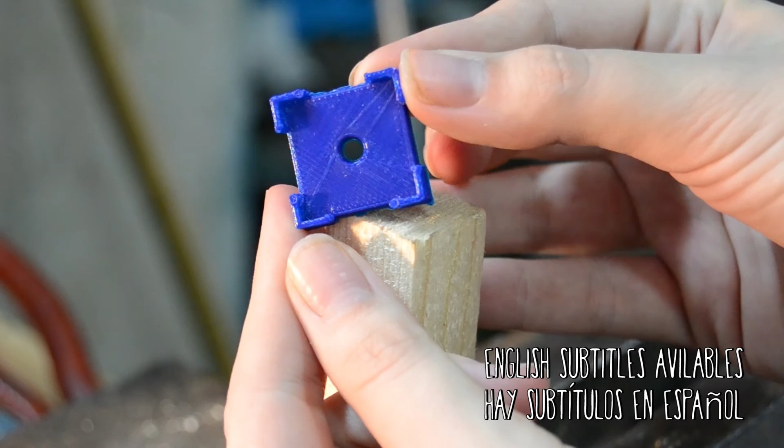I thought I could share the design process from my center finder or dowel placer from my last video, as you only saw the very watered down version in a sped up clip. Since then, I redesigned it to make it fully parametric for use in every slab type you have.

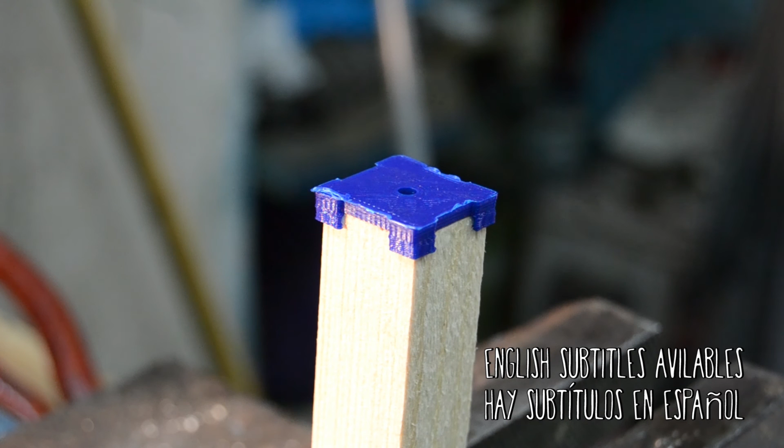First, I want to briefly mention my design approach to this geometric problem, since I based my design in one center hole.

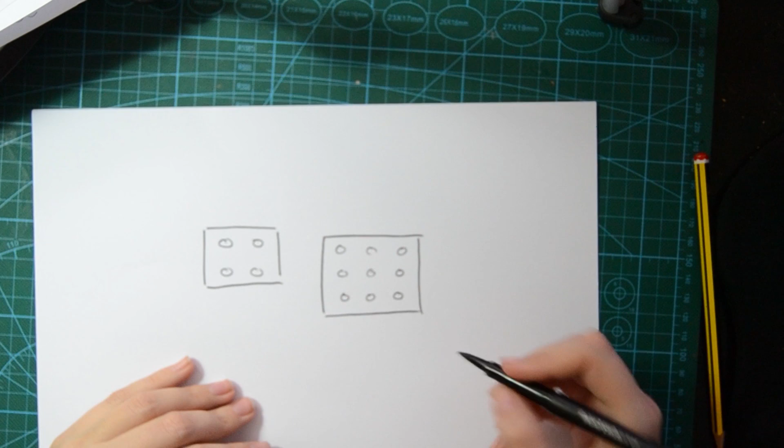The number of holes will be determined by two variables: the number of holes along the x-axis and the number of holes in the y-axis. And if in any of these axes the number of holes is odd, there will be a row or a column of holes, or a single one, centered in that axis. If not, there will be no center row or column of holes, so I had to find a way to express this in Fusion 360.

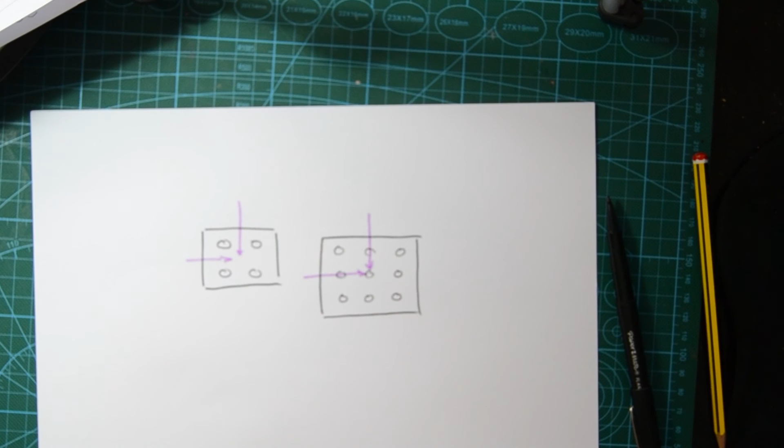Now we begin to design the piece. And since we'll be making it fully parametric, meaning that every measure will be able to be modified, we need to start defining parameters. Hole will be the diameter of every hole made.

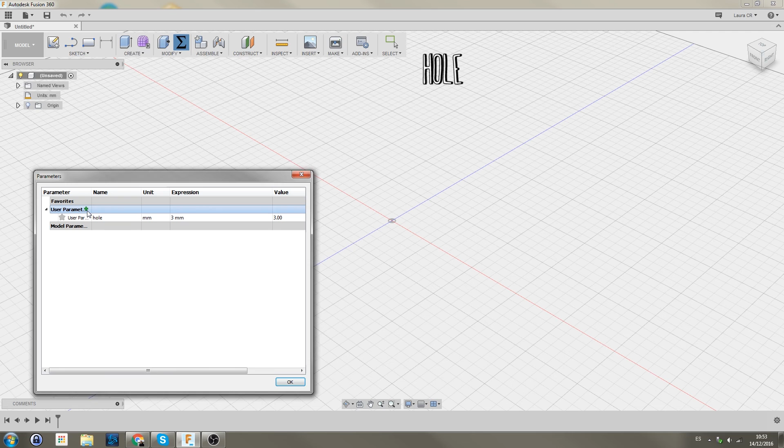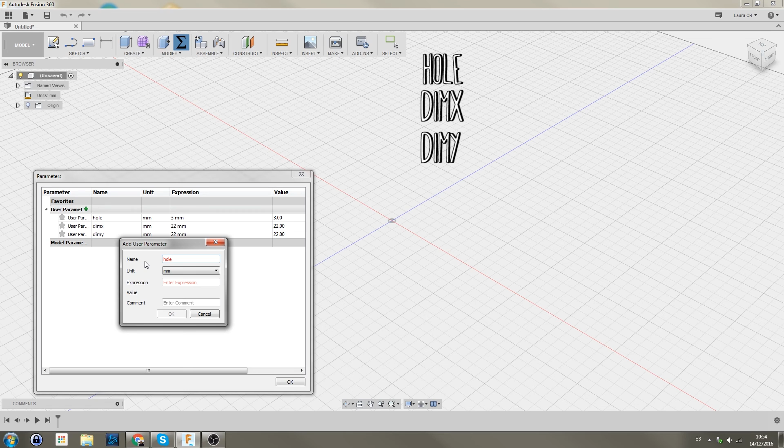Dim X will be one of the widths of the piece of wood we'll be using, and dim Y will be the other. Hole X will be the number of columns of holes, and hole Y will be the rows of holes. And both need to be a no-unit expression, or the formula will output an error.

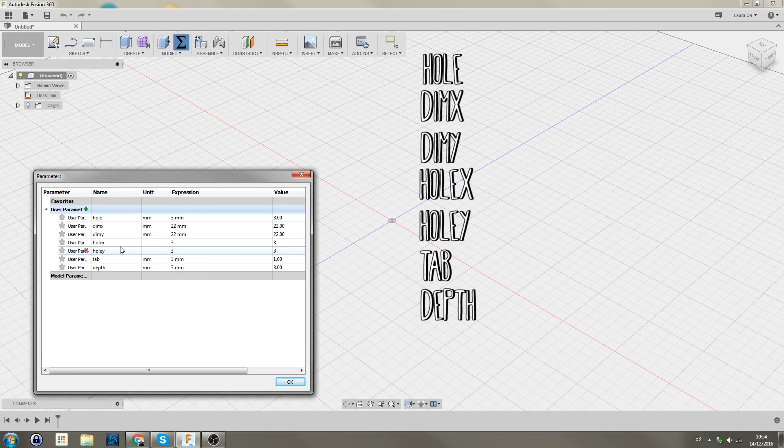Tab will be the thickness of the little tabs that will hold the printed piece to the wood, and depth will be the main thickness of the piece. AX will be the equivalent to a Boolean operator in the next formula, so it needs to be no unit in the unit dropdown, and the same for the y-axis in AY.

Odd X and odd Y will be the expressions that will help center the base hole, whether it's an even or an odd number.

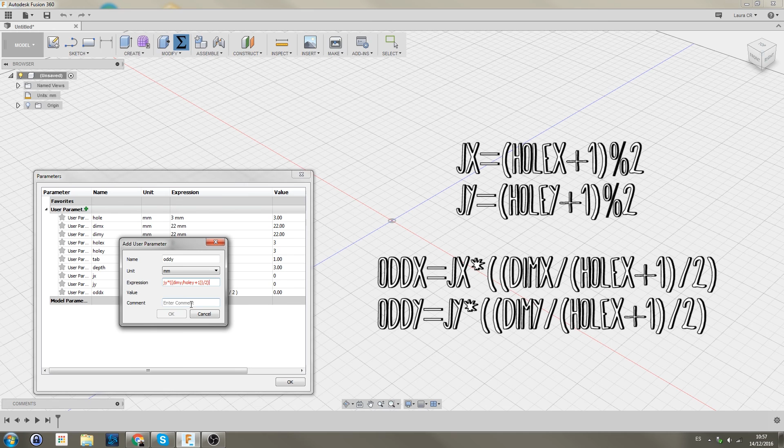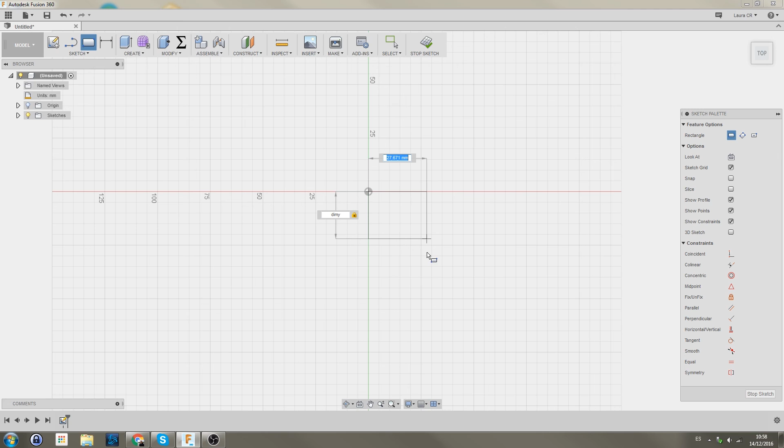We'll start to lay in geometry first by placing a sketch rectangle in the base plane and assigning it the dimensions dim X and dim Y in the X and Y axis. Then we will extrude it by an amount depth as defined.

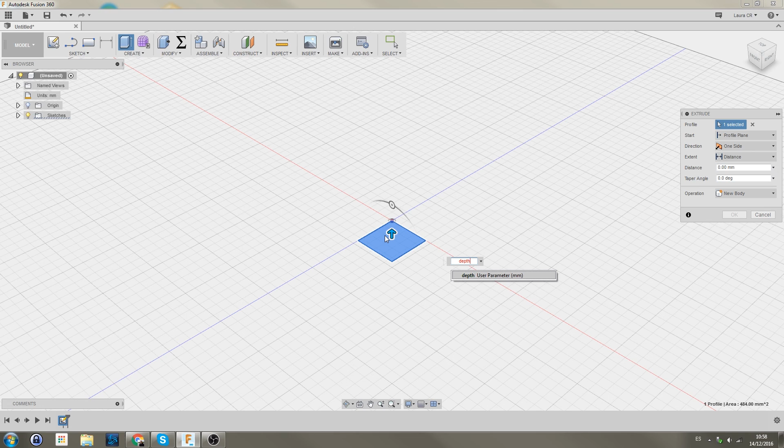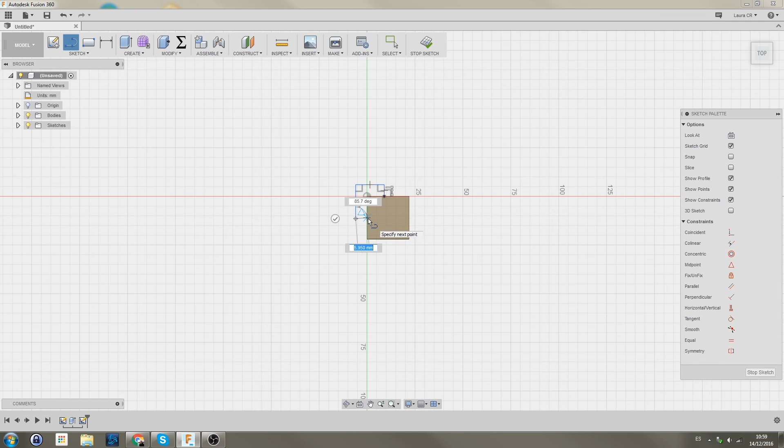Next, we will draw in the top left corner the first step, choosing the line tool and the upper face of the rectangle. We will assign dimensions starting with the thickness of the tab, which we define with the parameter tab, and the inner dimensions as 1/4 of the length in that axis.

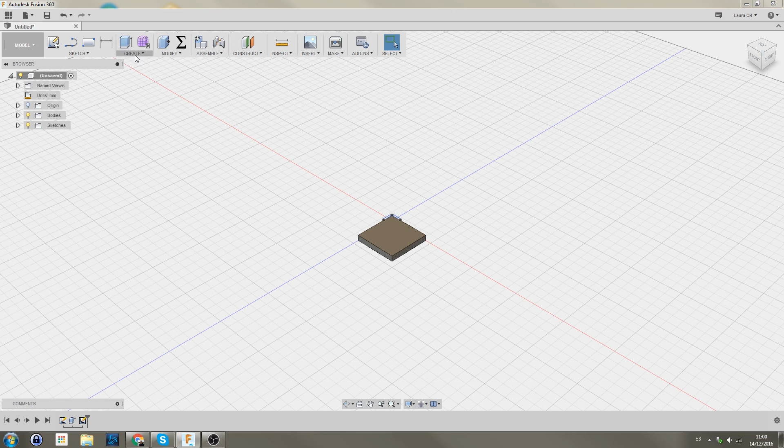This geometry will be extruded in both directions, the amount depth, and needs to be created as a new body in operation type.

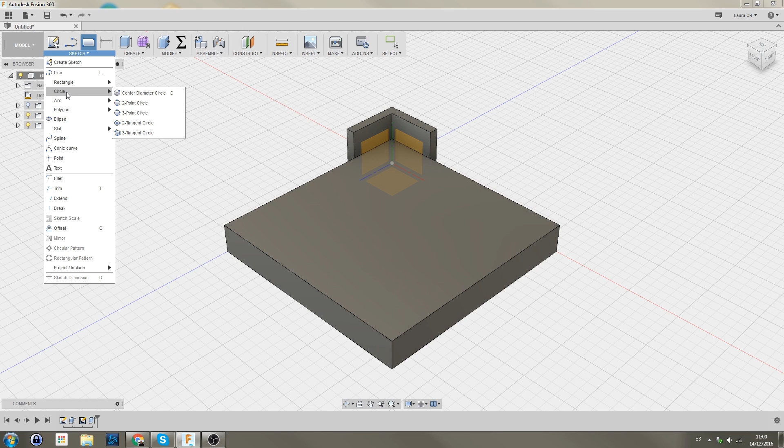Now we'll create the base hole, and we'll choose again the upper rectangle face to draw in it. We draw a center diameter circle and define the diameter as hole. And we need to define the center of it from the bottom left corner, with an expression as half dim x minus odd x and half dim y minus odd y.

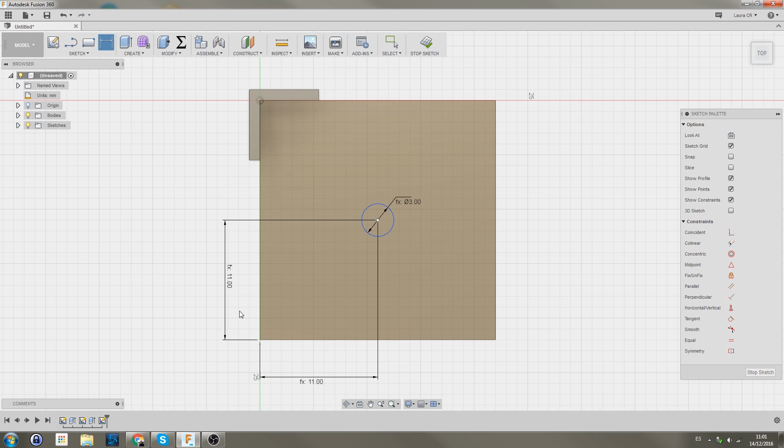This hole will extrude a minus depth, creating a hole through the entire piece.

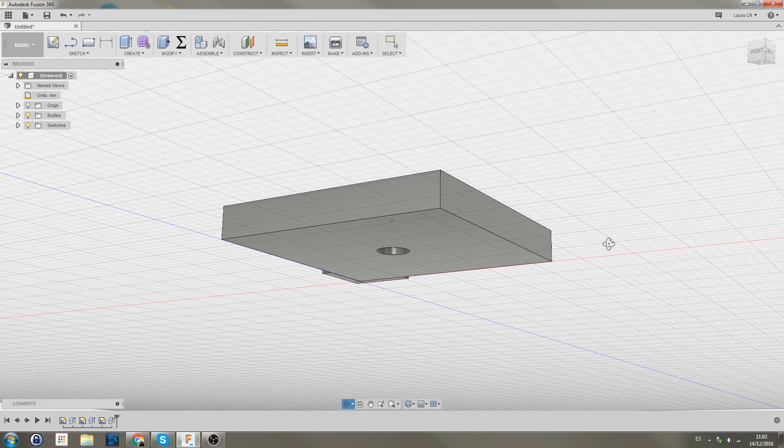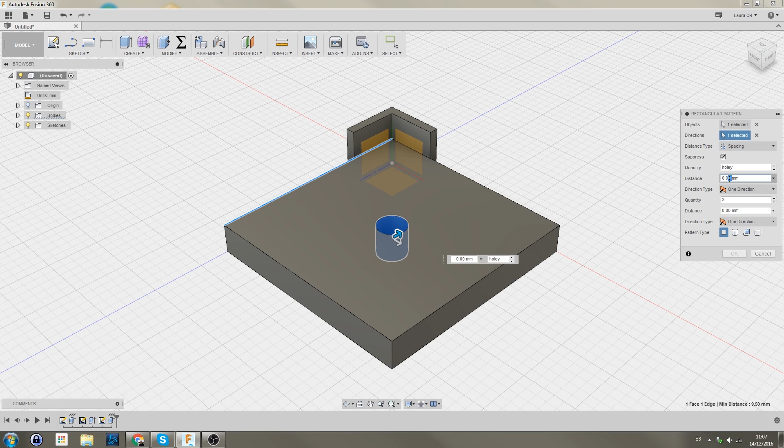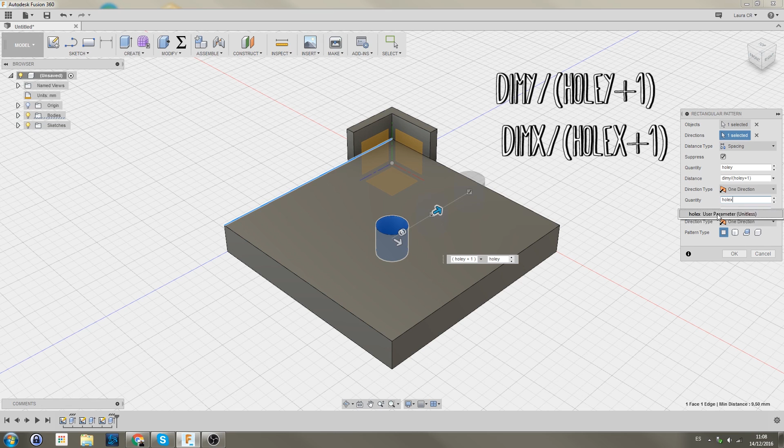The next step is a rectangular pattern, with the hole as a base, the upper left edge of the piece as a direction, and the distance type as spacing. The first quantity will be hole y. The distance will be dim y divided by hole y plus 1, and the direction type needs to be one direction. Likewise, the second pair of data will be similar, but with the x-axis variation.

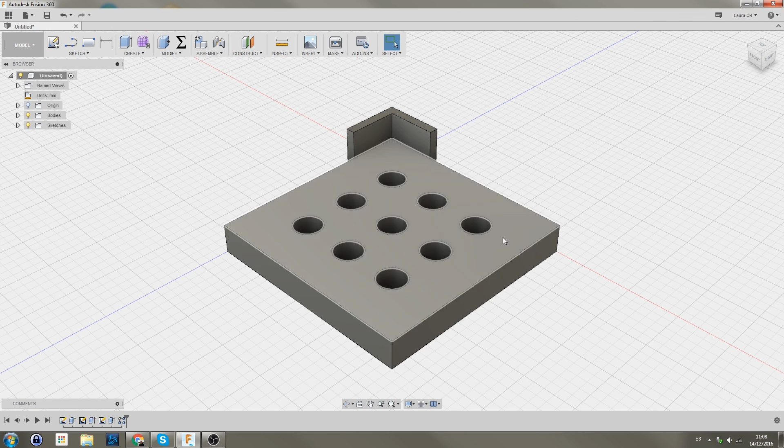Last, we'll need to create the remaining tabs with the mirror tool. For this, we'll create two mid-planes between the two pairs of opposite faces of the piece, and we'll use them to mirror the tab to every corner.

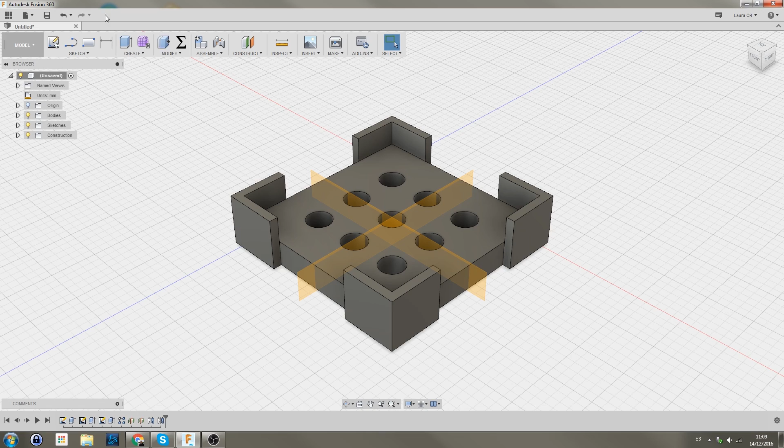And it's done. Now I will show you that you can modify every dimension you want of the piece and the number of holes you add, all from the parameters window.